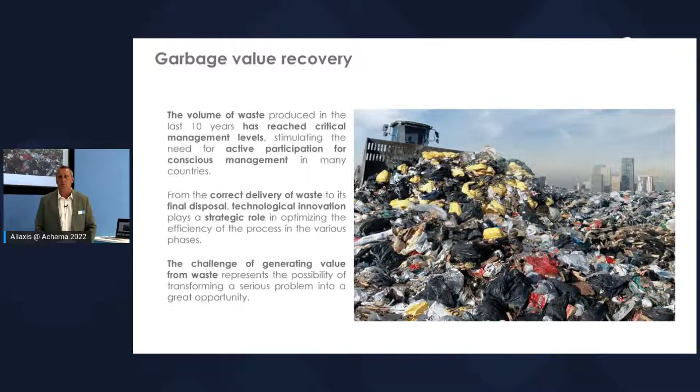We know that the planet is getting more and more crowded, and so all human activities generate rubbish in solid form as well as in liquid form. In these last 10 years, the amount reached a critical level, awakening a sense of duty for a cautious management of garbage. The process of rubbish management is quite long, starting from a correct delivery up to its final disposal, trying to maximize the amount of recycled material.

This is a challenge for sure, the challenge of generating value from rubbish. And it's in some way an idea to transform a problem into opportunity, chasing the myth of King Midas, who converted into gold everything he touched. To be more precise, today we are going to see a project related to precious metal recovered from e-waste, but I think it's important to get a clear picture of the scenario that we are facing.

Every year, 54 million tons are generated worldwide, and the European contribution is set at 12 million tons. So really a huge amount of e-waste. But what is e-waste? E-waste is the mobile phone that you have in your pocket, the laptop that you are using to follow this speech when they get aged, as well as all the electronic devices that you use every day. The increase by year is set at 10%, expecting to reach 74 million tons at the beginning of 2025.

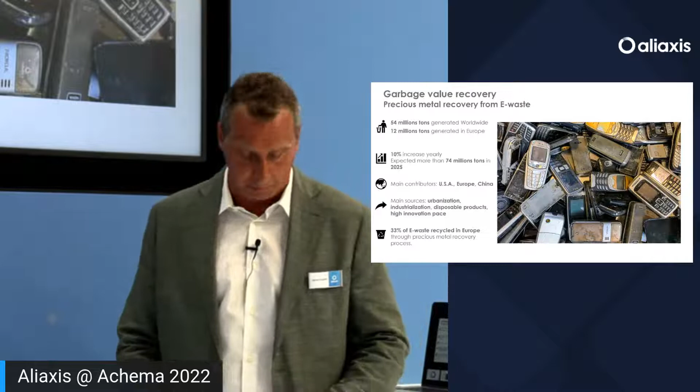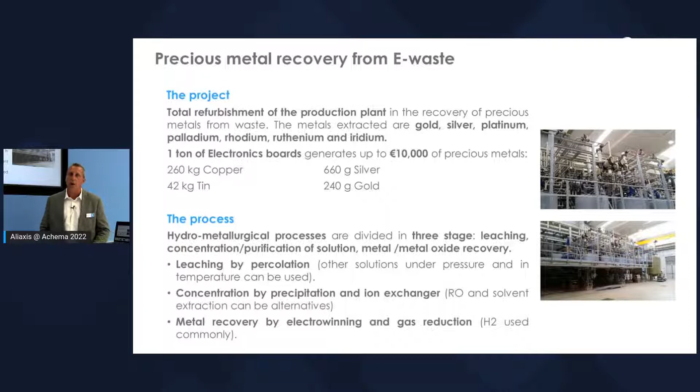The process that we are going to see is the complete renovation of a plant dedicated to precious metal recovery, and the metals extracted are different: gold, platinum, palladium, rhodium, ruthenium, and iridium, in addition to copper, nickel, and also tin. Just to have an idea about the potential of this business, from 1 ton of e-waste we are able to get a really high weight of precious metal, and the value is around 10,000 euros. In particular, we are able to get more than 250 kilograms of copper, more than 40 kilograms of tin, more than 600 grams of silver, and almost 250 grams of gold.

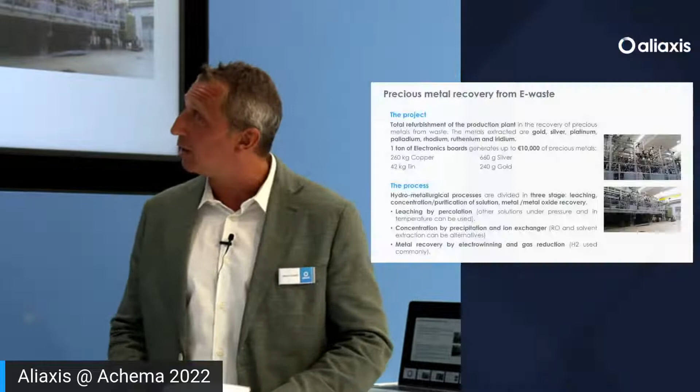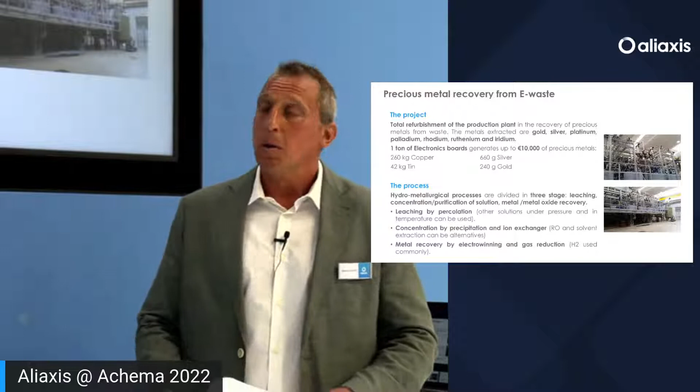Which is the process? The process is a hydrometallurgical process that can be divided into three different stages. The leaching process. After that, there is the concentration and purification of the solution. And finally, there is the metal oxide recovery. The leaching used for this plant is by percolation, but a similar process under pressure or in temperature can also be used. For the concentration, we use precipitation and ion exchange, but reverse osmosis technology can also be applied. And then finally, the metal recovery by electrowinning or by gas reduction. As gas, in this case, hydrogen is used.

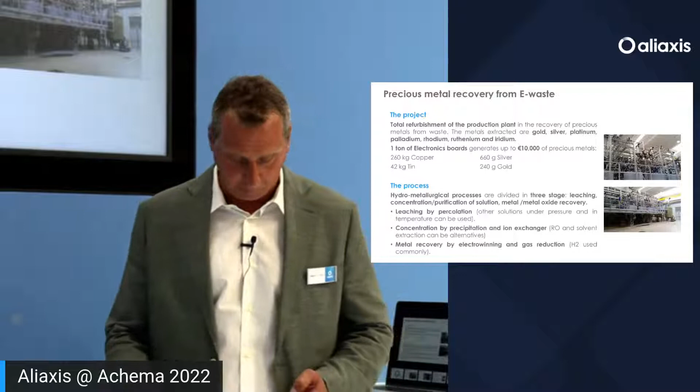Just to understand better the process flow, it's quite simple, starting with a mechanical pretreatment in order to fracture the PCB, the e-waste. This is a process that can help to increase the contact surface of these parts with the acid leaching, increasing the efficiency of the process.

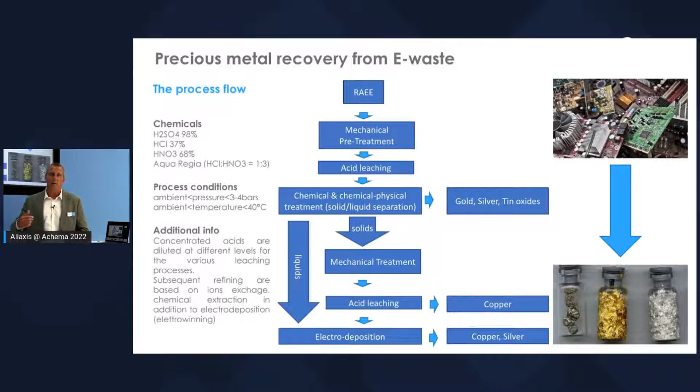Then there is a separation of the solid fraction from the liquid one, and we can start to get the gold and silver, basically. Then the solids are further fractured in order to, again, increase as much as possible the contact surface, and again, we can proceed with acid leaching. All the liquid fractions are gathered, and so we can proceed with the electrodeposition, the electrowinning, so the electrochemical process that can help to make them more pure.

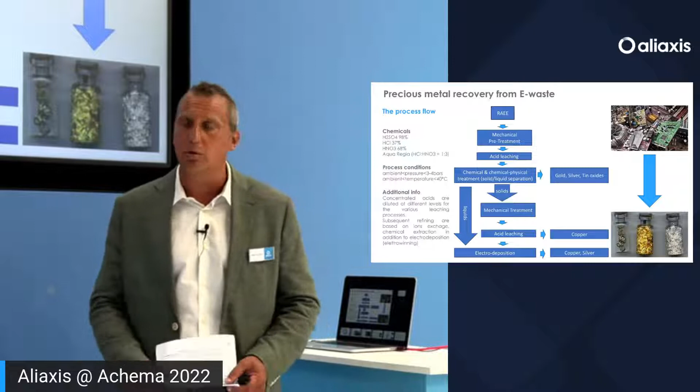As you can see, many aggressive chemicals are used: sulfuric acid, hydrochloric acid, nitric acid. So for sure we are speaking about aggressive fluids. The process conditions are not so demanding.

We can go on introducing the players of this project. Let me mention the project leader, that is Safimet. Safimet is a company focused on refining of precious metals, services that are offered to goldsmiths, but also to all the companies who are dealing with PCB and with galvanic processes.

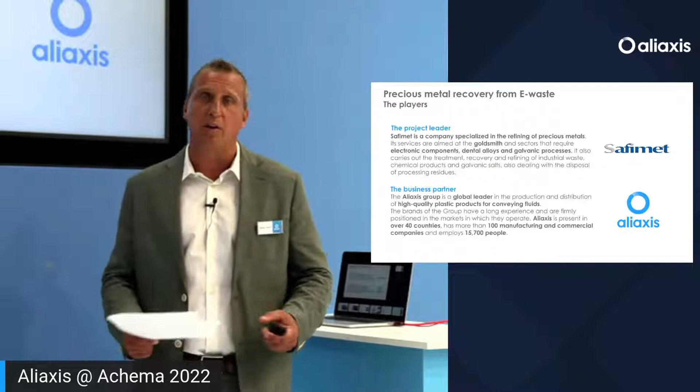On the other side, the business partner is Aliaxis Group, a well-known international group who produce innovative thermoplastic systems for fluid conveying, present in more than 40 countries with 100 different manufacturing units or commercial branches, employing more than 15,000 people.

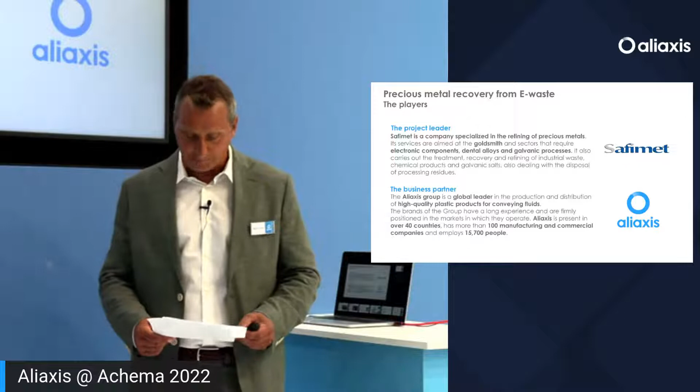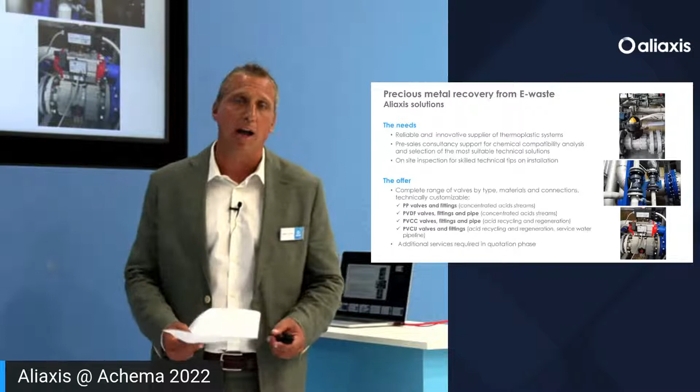Let's go on diving deeper on the dynamic of the process, starting defining the needs of the project leader, Safimet. So they were looking for a reliable supplier for thermoplastic systems, as we have seen that really aggressive chemicals are applied for this process.

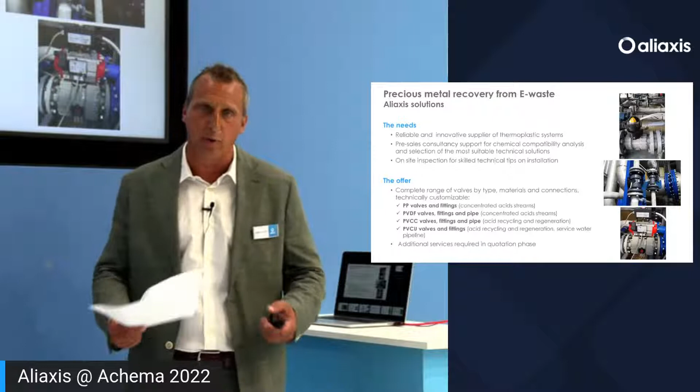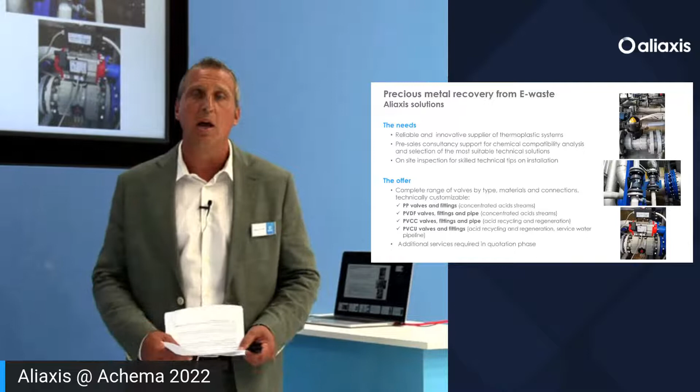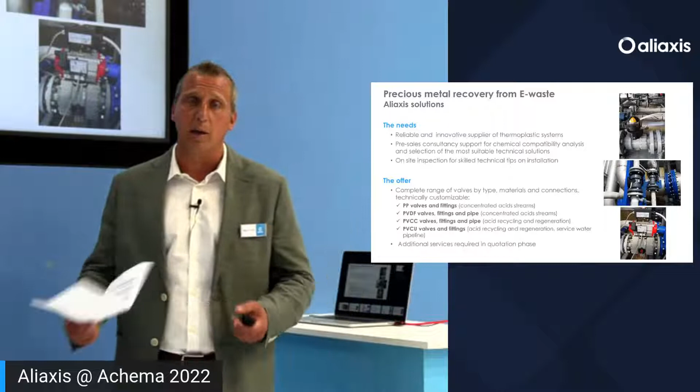Plastic is for sure the best option, but they were looking also for a company that was able to supply consultancy, so to make an analysis related to the chemical compatibility in order to define the best thermoplastic solution, offering high performances in a safe way for a long time. So we offered obviously these services, and we supplied them polypropylene valves and fittings, PVDF and CPVC valves, fittings and pipes, and also PVC-U valves and fittings.

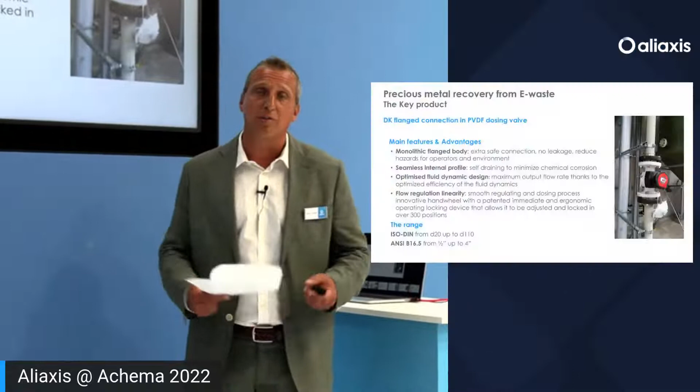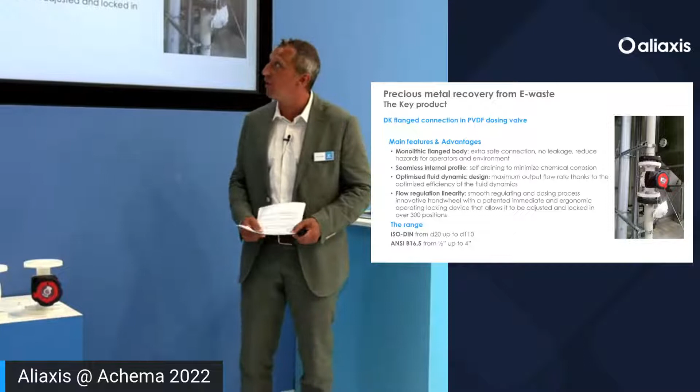In each story there is a protagonist, as well as in each project there is a key product. In this case, we decided to select the DK. The DK is a diaphragm valve, a very special diaphragm valve, in this case flanged and in PVDF. The monolithic body reduces the hazard for the operator and for the environment.

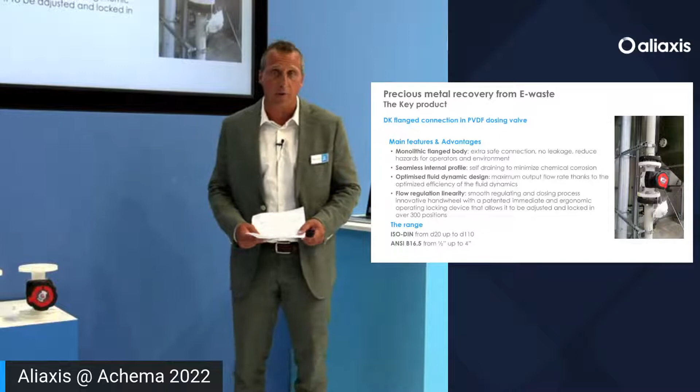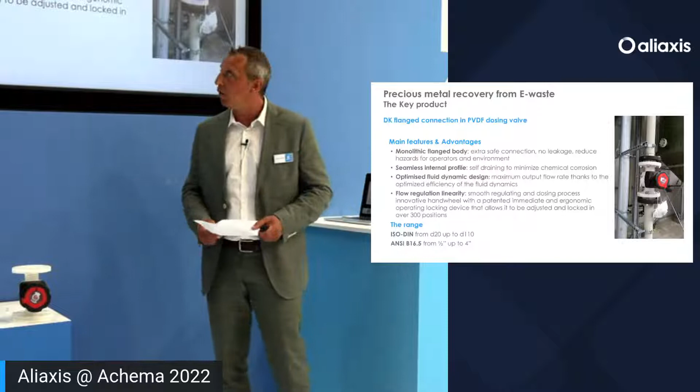A seamless internal profile provides a self-draining effect that can prevent corrosion. Then the optimized fluid dynamic design, thanks to the special internal shape of the body, can reduce the pressure loss, and more than 300 different positions of the membrane can simplify the procedure to find the proper hydraulic balance.

Available in different thermoplastic materials, CPVC, UPVC, PVDF, polypropylene, with different process connections. In this case, we mentioned the flanged one in both main norms, so ISO and ANSI.